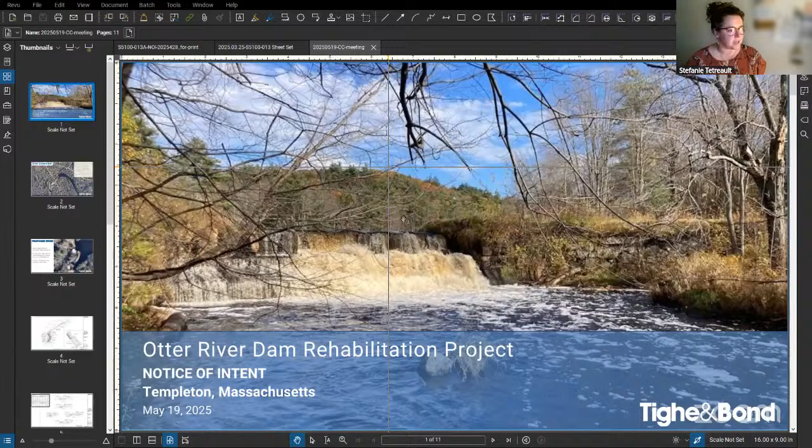Okay, so are you seeing this cover slide here with the photo of the dam? Okay, so again, thank you. My name is Stefanie Tetreault. I'm with Tighe & Bond. I am here on behalf of Seaman Paper Company to present this Otter River Dam rehabilitation project.

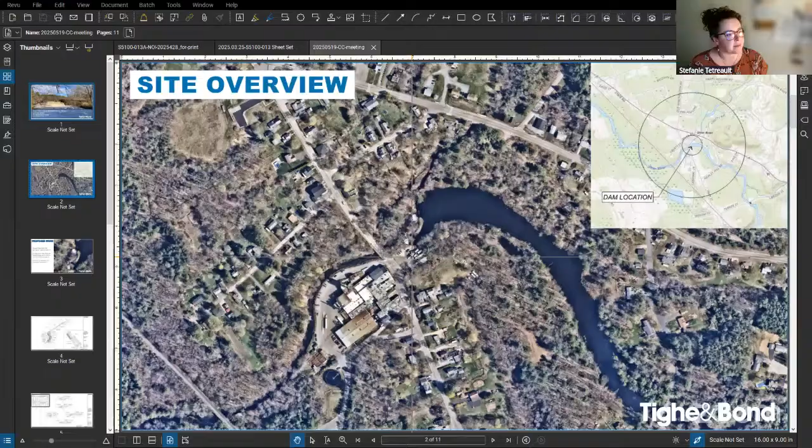This is a closer view of the aerial image and just a quick summary of the proposed work. So the dam itself is rather overgrown with vegetation. Some of us were there last week to see it on site, but the first step in the process is going to be vegetation removal within 20 feet of the dam and the dam embankments, and that is per the Massachusetts DCR dam safety standards. And that includes above-ground vegetation as well as the root masses.

After that, the project proposes to rehabilitate and provide overtopping protection for the embankments on the left and right side as you're facing downstream. So the left embankment is on the south side and the right embankment would be the north side, as I refer to them. And that will involve preparing the surface. As you saw on site, there's some degraded sandbags and some slumping in some locations. So the surface will be prepared and then it will be overtopped with type 1 and type 2 riprap.

What you can't really tell, partly because there's so much overgrown vegetation, is that there are existing stone walls on both the upstream and downstream sides of this left embankment here. In a couple photos, you can actually see the stone wall that is on the inside of this bend, but there's another one here that we were actually standing on as we walked out onto this embankment last week. There's an additional stone wall over here on the north side on the right embankment, and the intent of the project is to really reinforce those walls by providing this overtopping protection.

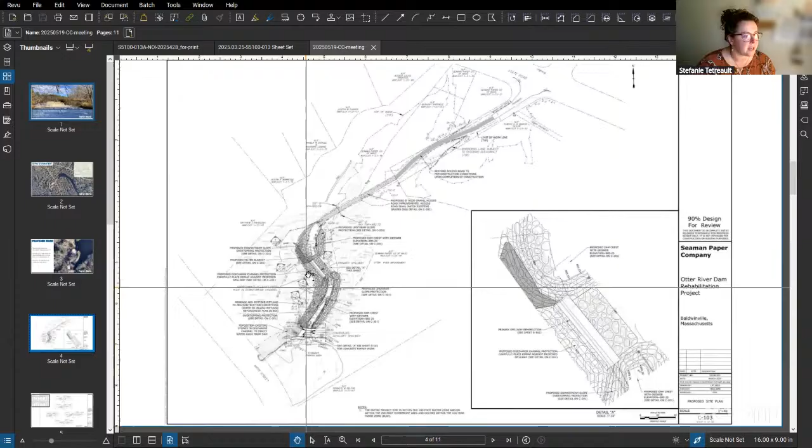That will provide access from the north to the north side of the dam at this embankment. Vegetation will be removed again from within 20 feet of this whole embankment, which is essentially this entire southern embankment. This symbology you see here is the riprap overtopping protection, and there will again be concrete repairs to the primary and auxiliary spillways.

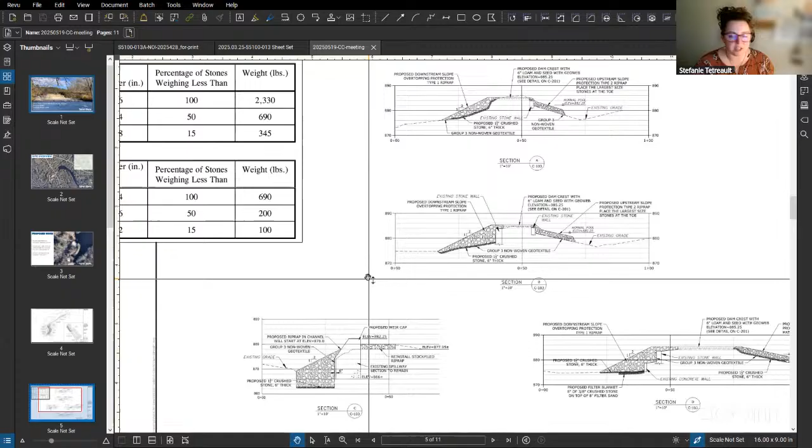So I put this slide in because somebody at the site walk was asking about the dimensions of the riprap. I'm going to zoom in a little bit here - you can see in most cases these are cross sections of the proposed embankment overtopping protection. On the upstream side it's mainly specified as type 2 riprap, and on the downstream side it's type 1 riprap, and that's true throughout each section, the entire length on both embankments.

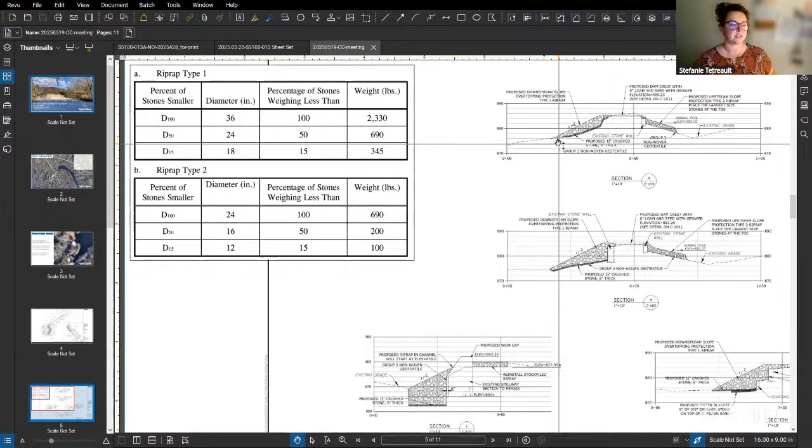The actual size of that riprap - type 1 riprap has a D50, a median size, of 24 inches, 2 feet in diameter, so most of the material will be at least 2 feet in diameter. This is large rock. Type 2 is slightly smaller, 16 inches in diameter. The larger rock is on the downstream side, where you'd expect that in the event these embankments overtop there's going to be a lot of turbulence, and the hydraulic analysis supported the need for this size riprap to withstand that amount of energy.

I'll zoom back out here. I don't want to make anybody dizzy.

I would say good, keep going.

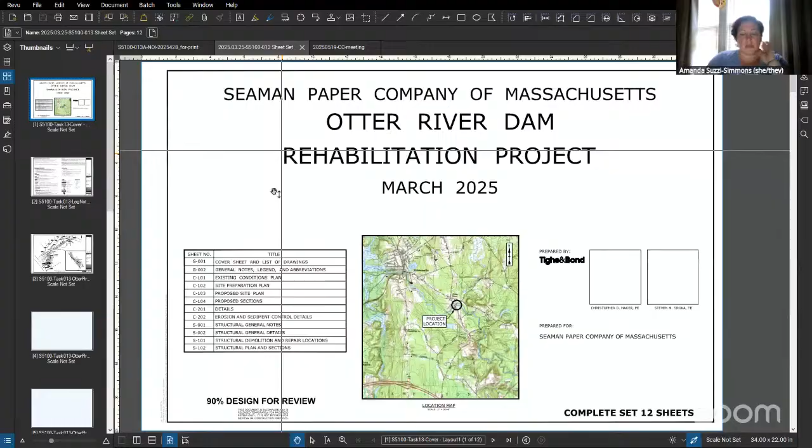Would you mind including somewhere just pinpointing where that bordering vegetated wetland replication will happen? Just in some sort of document, unless you have it already - and that's awesome, I missed it. So it's on here.

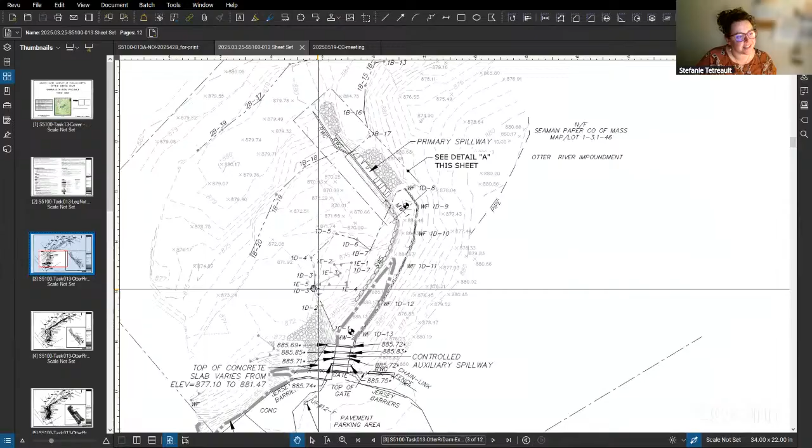Okay, perfect. This is the existing conditions view, so it's a little cleaner to see - this is the wetland we're talking about. And if I skip ahead here, you can see this little wedge is what's being impacted.

And so this little wedge here, it's only 21 square feet. That is the area to be replaced. Wonderful, thank you. That's great.

Also, the work will be done when the river is at its lowest, correct? Yes. So right now the schedule is largely, entirely dependent on receiving the permits. So this is our first stop.

And then we are in the process of the 401 and the 404 federal permits and water quality certification. We expect to receive those in the fall, but that is going to be a challenge for constructability due to normal high flows. If the conditions are suitable, they will try, within the extent of the conditions, to get the work done as soon as possible.

But that will require work in the dry, and that's only doable when the river is at a lower flow stage.

I didn't really talk much about water management, but I mentioned there'll be a cofferdam to enclose the primary spillway on the up and downstream sides. During that portion of the work, water will be flowing through the auxiliary spillway.

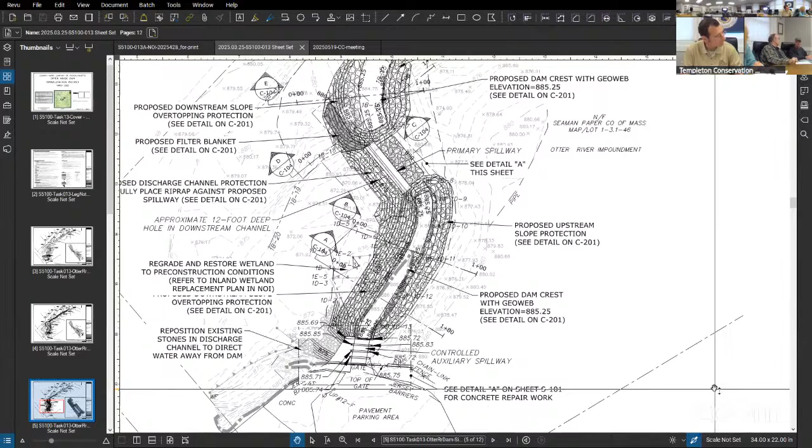This project is straightforward, but my other question - that piece of pipe we saw up there in the pond, the mysterious pipe in the river - does anybody know what that is? Not yet. Dave's question is about when we were on a site walk, there was a mysterious floating pipe in the river. Maybe you could pull up a picture of it, Stephanie.

So they're going to be looking into it. The only thing I could think of possibly is that at one point this pipe was stretched across the river to stop any floating large debris from going into the spillway and dam area - logs and whatnot, a pipe like that would stop it. Yeah, that's the only thing I could come up with.

And the Historical Society said there used to be a building in the parking lot that may have had something to do with what's out there too, until they can look into it. It's a pipe that has its own island, and they say it raises and lowers. If it raises and lowers, at some point you'd be losing the elasticity of the pipe.

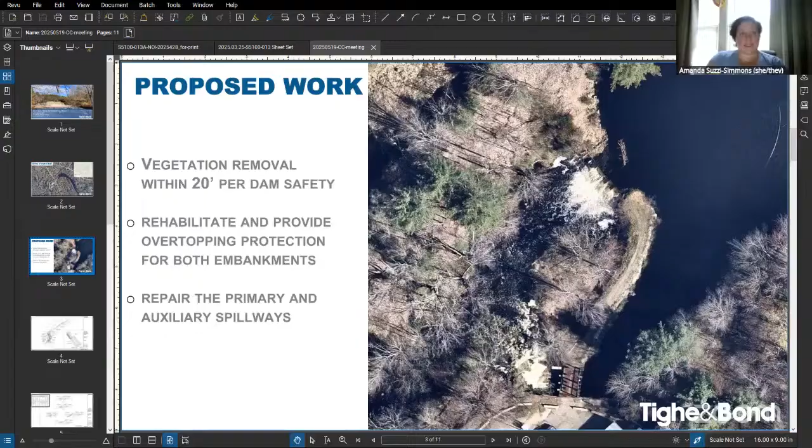Okay, on a motion to continue the public hearing to next meeting, how do you vote? Amanda, yes. Joanne, yes. Dave, yes. George, yes. Krista, yes. Very good.